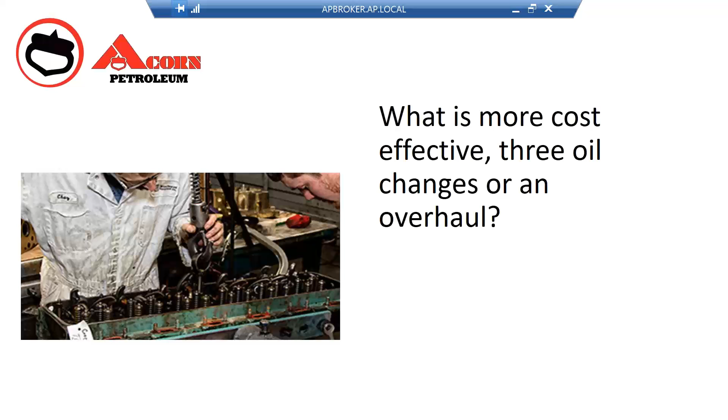So, what is more cost effective, three oil changes or an overhaul? Or is there another option? We've all seen the LifeLock commercial where the bank is being robbed and the people ask the guard if he was going to do anything, and he goes, "Oh, I'm not a guard, I'm a monitor." And, well, what's the monitor do? He goes, "Well, I tell you that you're being robbed." And then he goes, "Oh, you're being robbed."

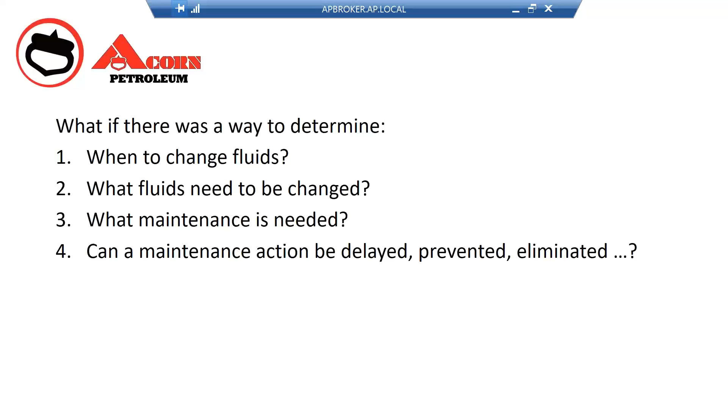And that's a lot like how we find out that there's a problem, when the problem has already surfaced and it's too late to do something about it. But what if there was a way to determine when fluids needed to be changed, what fluids needed to be changed, and what maintenance is needed, and if a maintenance action could be delayed, prevented, or even eliminated?

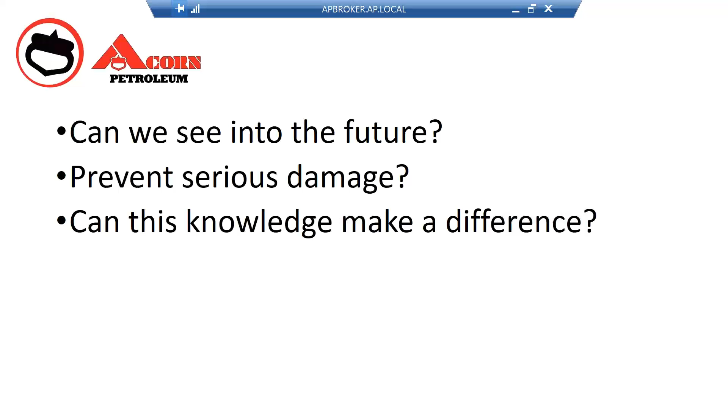Can we see into the future? Can we prevent serious damage? Can this knowledge make a difference? Of course it can. So let's take a look into the future.

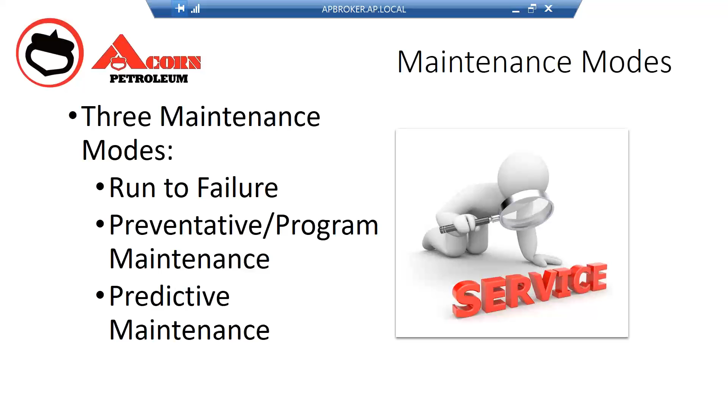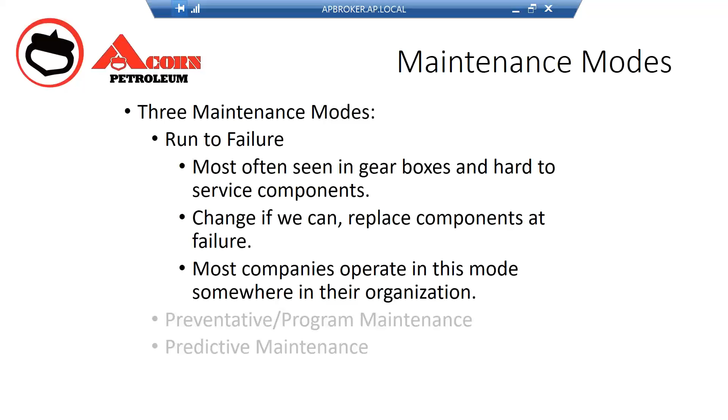In most situations, there are three maintenance modes. There's run to failure, preventative maintenance, and predictive maintenance. Run to failure is most often seen in gearboxes and hard to service components. It's in things that are difficult or almost impossible to maintain and inspect. We change them if we can. We replace the components at failure. That's basically how run to failure is managed. Most companies operate in this mode somewhere in their organization, and sometimes by design, because it's out of necessity.

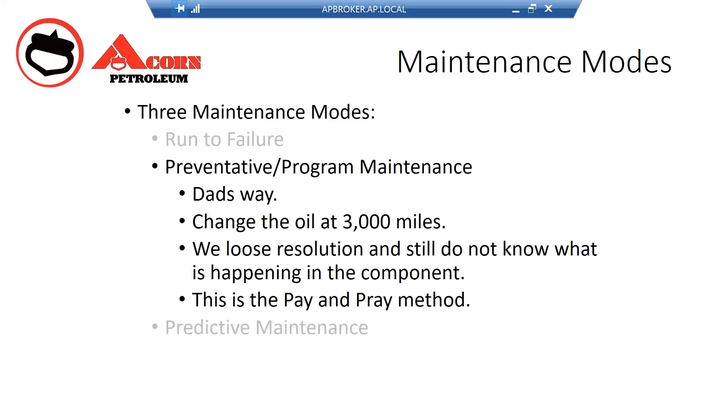Preventative maintenance is dad's way. Change the oil at 3,000 miles, that sort of philosophy. We lose resolution. We still don't know what's happening with the component. We don't know what's going on inside the machine. I call this the pay and pray method. It's not our fault. We've been programmed to do this over the course of our lives.

In the owner's manuals in cars, the back pages are filled with little check boxes that you fill out if you did your oil changes every 3,000 miles, and did you check the fan belts, and all the different things that you were supposed to do in a program maintenance fashion every so many months or so many thousand miles.

But there is a predictive maintenance model. And that uses analysis to discover what's happening with the component, looking for wear elements to determine if there's a pending failure, and learning what the lubricant condition is at the time of the sample. We're determining if any additional analysis is required.

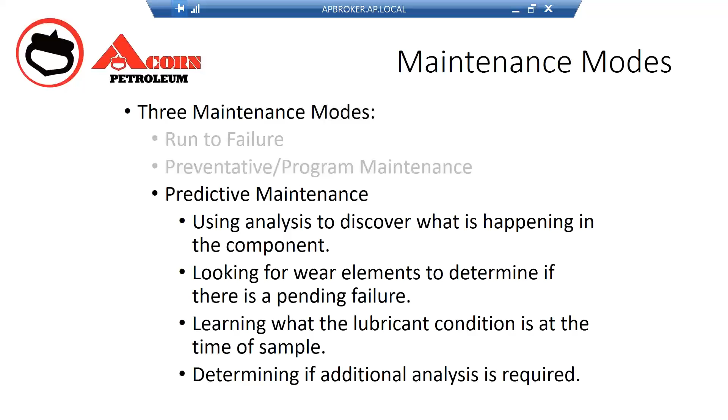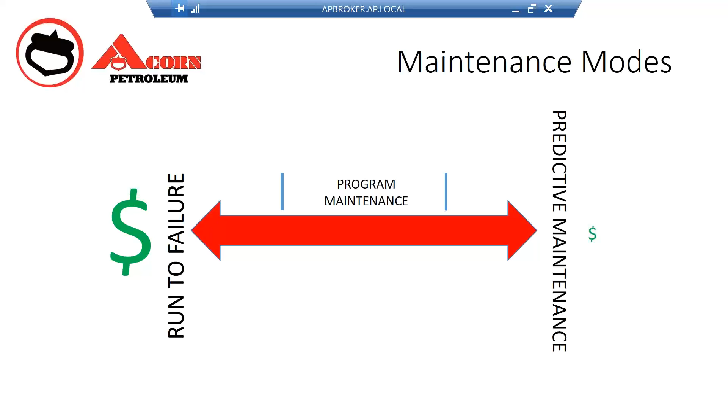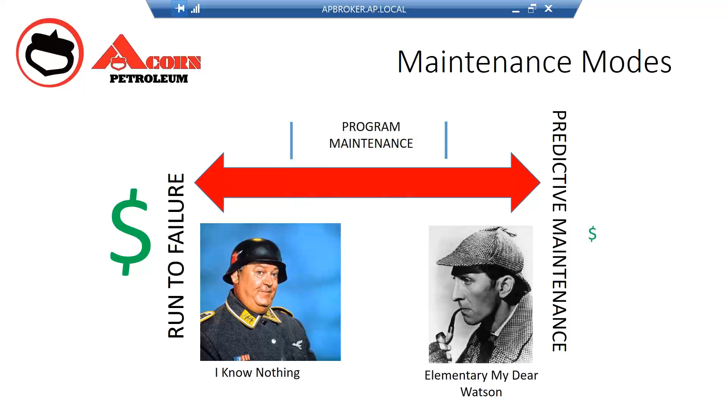The problem is that with run to failure, you still know nothing about what's going on with the component. And with predictive maintenance, you have a pretty good idea of what's going on and where you sit with that piece of equipment. So in predictive maintenance, once we have a history of analysis, we're able to determine the trend of the asset. Basically, we develop a normal.

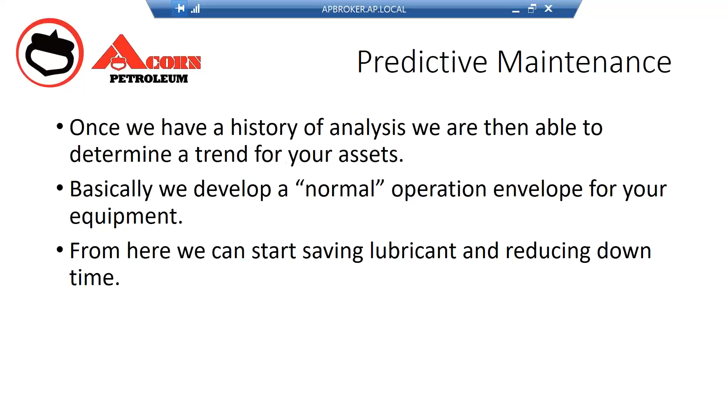And in this normal envelope, when there's changes, we can determine what's going wrong with the component. And from there, we can start saving lubricant and reducing downtime. And we do this by using the exact same tools scientists use to figure out how the universe was made, what the universe is made up of.

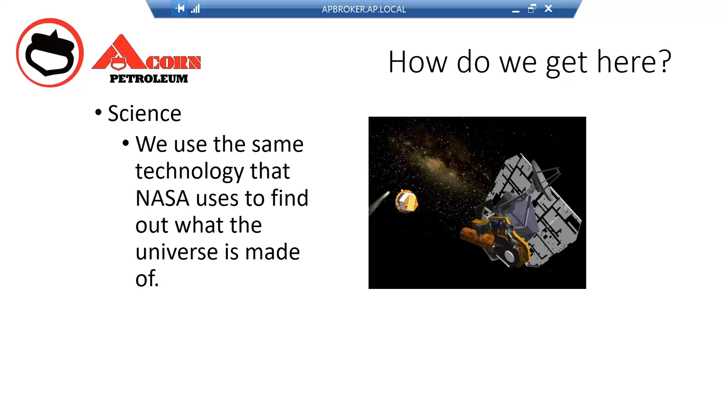Just like your doctor orders blood work before you go in for a physical, this tells them exactly what the state of your overall health is. Without knowing your temperature and your heart rate and things along that line, they can tell pretty much anything that's wrong with you from a blood test nowadays. We can do the exact same thing with an oil sample.

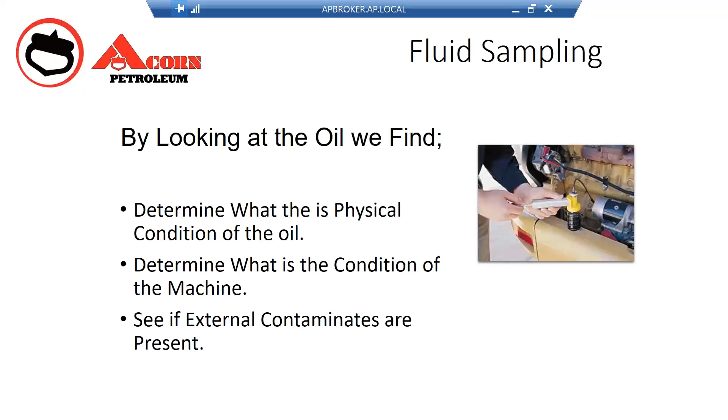We can tell a lot from an oil sample as to what's going on with a piece of equipment, without doing a physical examination of the equipment itself. And we can see what the condition of the oil is. We can determine what the state of the machine is, and we can find out if there's any external things getting into the machine.

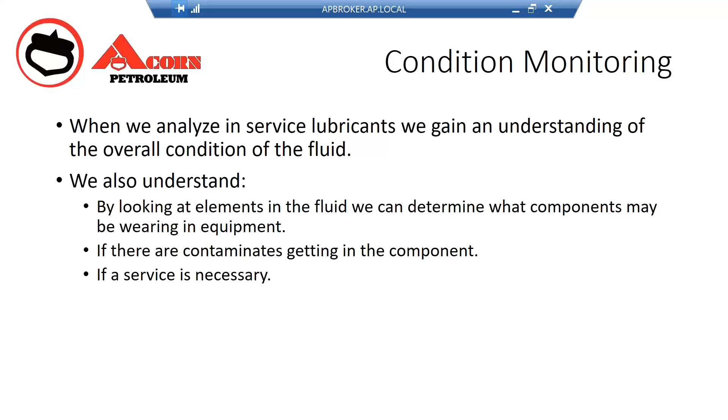When we analyze in-service lubricants, we gain an understanding of the overall condition of the fluid. And like I said, we can look at the elements of the fluid, determine if the components may be wearing out, if there's contaminants getting in, and if we need to replace any parts or pieces.

So this is the bathtub curve. And what's nice about trending is we can trend in the fact that there's a break-in period, and we know that there's going to be some anomalies in the oil samples during the break-in period. But once we get past that, everything flattens out. And it stays pretty consistent throughout the lifespan of the equipment until we get to the end of life. And then things start going awry.

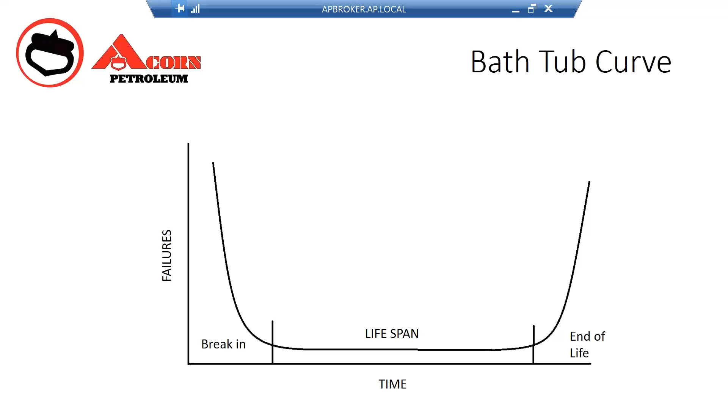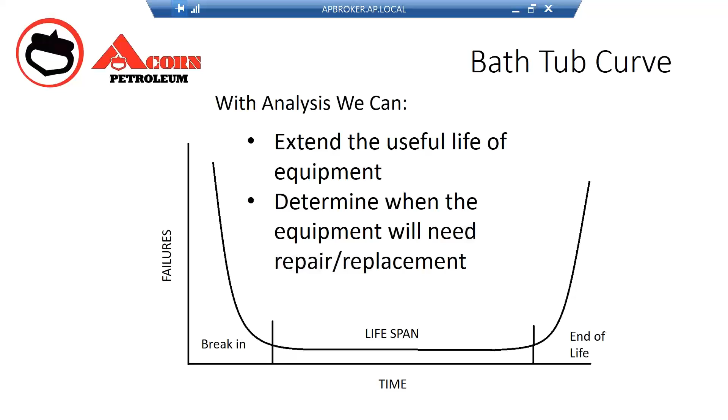So it's during that time when we can look at that flat line, that becomes our normal. When things deviate from that, we know that we have a problem. So we can extend the useful life of the equipment by maintaining the flatness of the curve. And we can also determine when the equipment will need repair or total replacement.

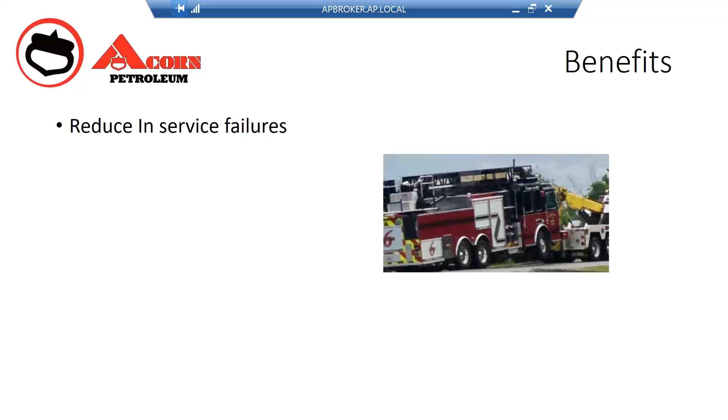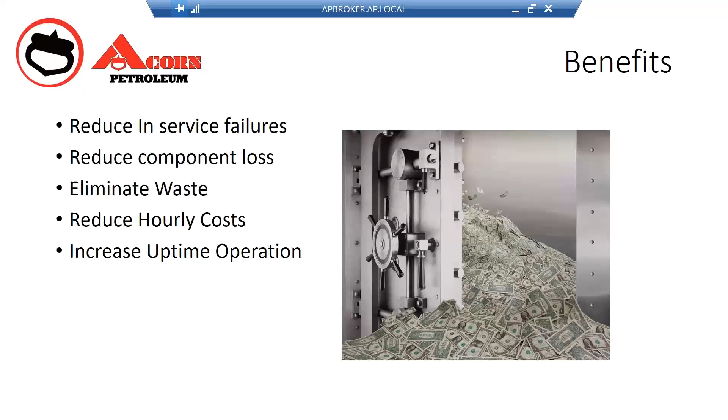This helps us to reduce in-service failures. There's nothing worse than a piece of equipment failing when it's needed most. We can reduce equipment loss or component loss. And then we eliminate waste and time, and increase the uptime operation. Those are the things that we are really looking to do.

We've talked to a company that had 25 pieces of construction equipment. We saved them over $20,500 a year by increasing drains from 250 hours to 350 hours, just by doing that. But the side benefit of that was we were able to give them insight as to what was going on with their equipment and prolonging the life of their equipment by eliminating some dirt intrusion, things along that line.

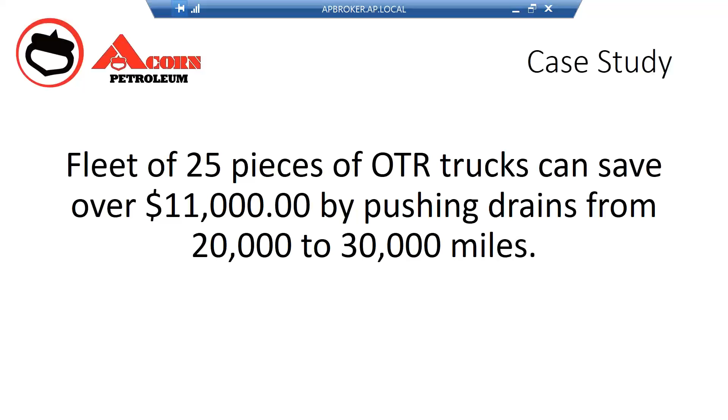Over the road trucks, we saved a company over $11,000 a year by pushing their drains out. Again, this was just in the cost of the lubricant. It's not looking at the hourly wages of the employees that changed the oil, things along that line, the downtime, loss of service, and we gave them a little piece of insight as to what was going on with the equipment.

I had a construction company that we showed we could save $1 an hour on their operational costs per piece of equipment using oil analysis. And the company just looked at us and said, we just won every bid we ever participated in, because that's the difference. That was the key. And they embraced the oil sampling program, and they still are doing it to this day.

We had a production plant that we were working with. Because of oil analysis, using oil analysis in their operating machines, they were able to plan for an outage that was going to occur. They had a piece of equipment that was going awry. They had a holiday period that was coming up.

So they managed to shut down the line during the holiday period when everybody was gone, and keep the millwrights there. They repaired the equipment during the holiday period, saving the company thousands of dollars of downtime. Having employees there while the machine was down would be devastating. But they were able to program a maintenance evolution during a holiday period. This was a lifesaver for them.

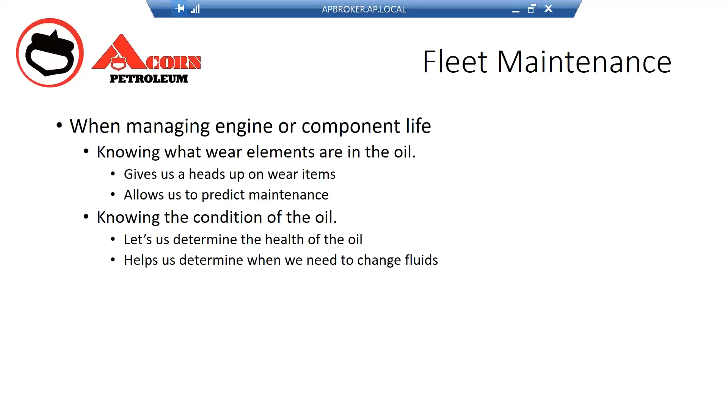We can extend drains, we can increase the uptime, lower costs, increase productivity, and eliminate waste. And we can also predict your downtime. That puts maintenance on your terms. That's very important.

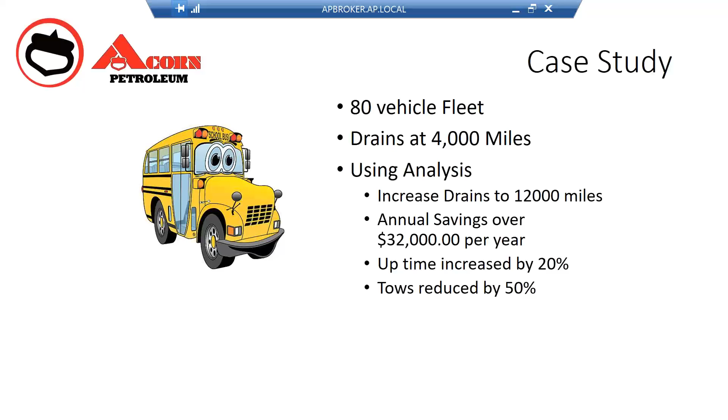Talking to an 80 vehicle bus fleet that had drains at 4,000 miles. By using analysis, we were able to increase their drains up to 12,000 miles, and that saved them $32,000 a year in lubricant. Their uptime increased by 20%, and their tows reduced by half because they could see into the equipment and they knew there was a problem before it reared its ugly head during a route or something along that line.

Using oil analysis, you can pinpoint failures without tearing down the entire machine. An oil analysis itself is more like a CT scan of the equipment. But there are other types of oil analysis that are like MRIs, where we can pinpoint right down to the component that's wearing and why it's wearing. That eliminates expensive trial and error repairs, throwing parts at equipment, or lets you do just a minor tear down as opposed to a complete tear down to find out what's wrong.

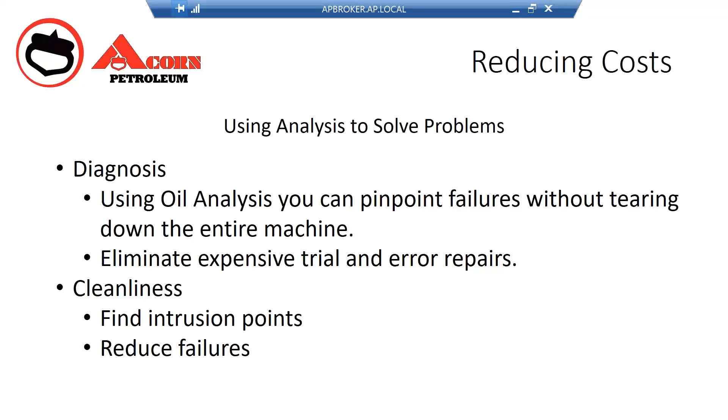The other thing that we can do with oil analysis is find intrusion points. Find out if there are outside contaminants getting into the oil that will cause problems. This will reduce failures in and of itself and prolong the life of the equipment.

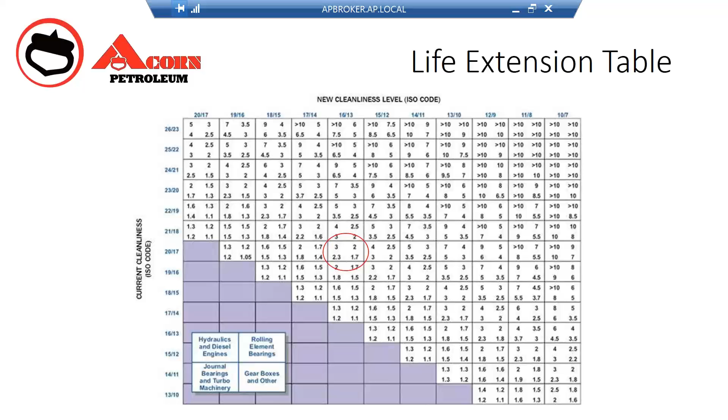We had a construction company that discovered a source of silicon intrusion using oil analysis. We found out where the intrusion was. We isolated that, then we looked at the entire system, added a couple filters, and we brought their cleanliness way down. Literally, the pumps in that piece of equipment will never wear out at this rate because there are hardly any contaminants in the system at all.

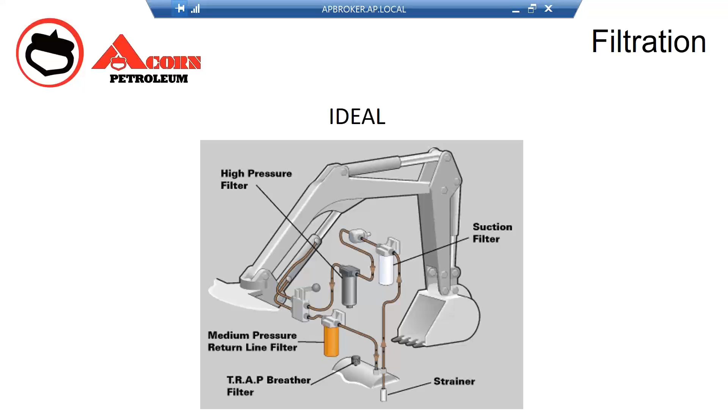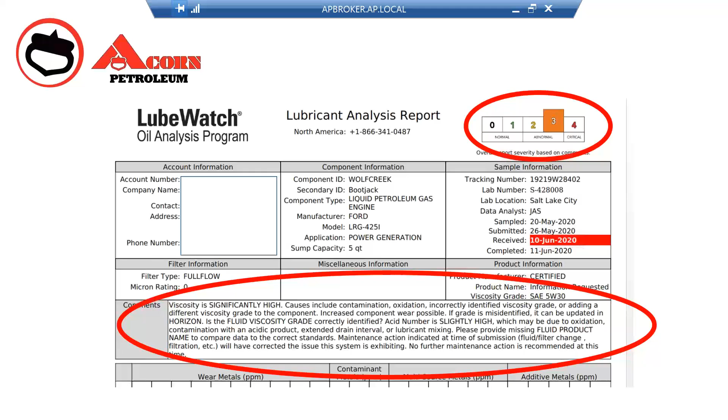By looking at an oil sample, if we can see that there's an abnormal reading on the oil sample, we can go straight to the comments section. Most all the oil analysis companies that we work with have massive databases of equipment and problems that can be realized. So they have a database, and say they see these particular parameters showing up, they can almost point to where the failure is, or what needs to be looked at from the very beginning, saving the repair people tons of time.

Again, looking at the trouble points, this gives you an idea, data showing that the lubricant's getting thicker. Well, if we know that the lubricant is not in the world's best condition, it may need to be replaced. In this particular case, the thickening of the oil would cause additional friction. It would do more damage to the equipment than help.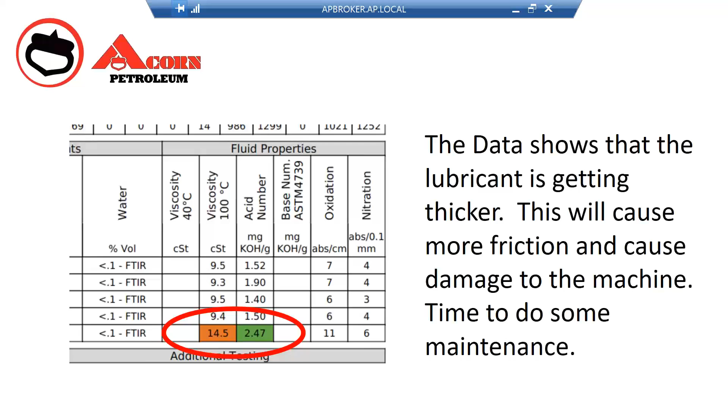So what do you consider in an oil sample program? What are your goals? To reduce downtime, reduce costs, increase uptime, increase profits, all of them. What are your present capabilities? What are your equipment requirements? Do you have to train people? Do you need parts, pieces, infrastructure? And how will you track your progress, the KPIs? Is there software? Is there staff that you'll have to add?

And what are our expectations? What are your short-term and long-term goals? And what are the historical considerations that you have? What have you lost in the past that you'd like to prevent in the future? We always say to set realistic goals. And where do you start? Well, it starts with a pretty good understanding of where you are.

How do you get training? Understand that consistency is the key in everything. Look forward to the goal. Buy-in from everybody involved. Everybody in the company has to buy into this process from the beginning to the end, and continue to improve. And I always like to take the hint from every shampoo bottle ever made: rinse and repeat. So only you know where to start. Most start with their most expensive problems and work backwards from there. And that's usually the best way to go.

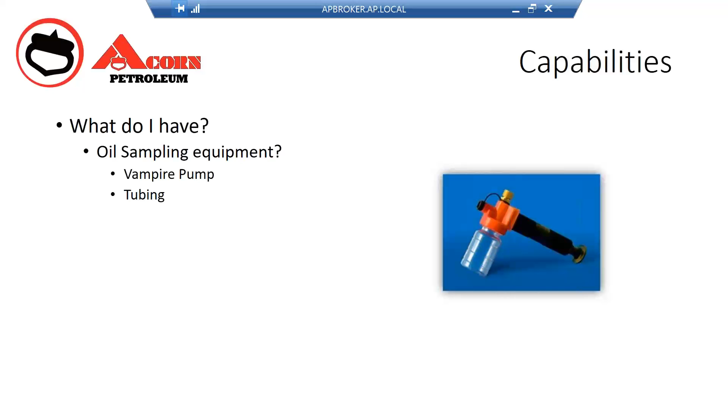Where do you start? What are your capabilities? What do you have? Do you have oil sampling equipment? What laboratory services do you need? What kind of training do you need? And how are you going to keep on the right track? Well, basically, the oil sampling equipment, for the most part, is just a vampire pump and some tubing. It's not that expensive.

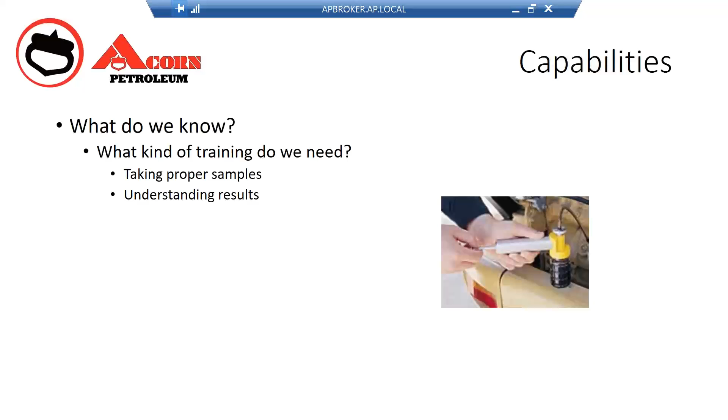What do we need to know? Well, what kind of training do you need? Taking proper samples and understanding the results. Acorn Petroleum has training in all of those things. We can train your people on how to take the proper samples, and we have an extensive training series on how to understand the results. And with very minimal time invested, we can get you up and running with a very, very effective oil sampling program.

So it starts with an independent survey, assess where you are in the process. Equipment lists, we need to start seeing what your equipment is. The equipment name, the compartments, the fluid types, that sort of thing all has to be categorized. And then we make the call.